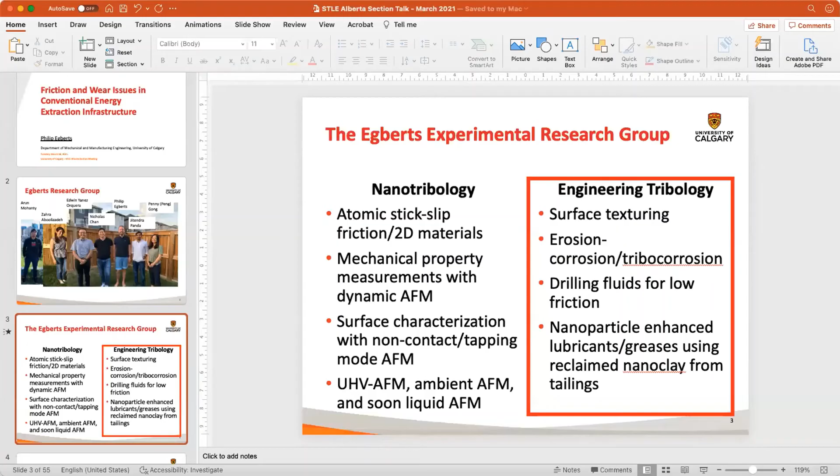Did we lose you, Philip? I will see if I can get a hold of Philip here. Sorry about that, everyone. We'll just give Philip here a minute. I see you, Philip. You're just muted. I vanished for a second. Sorry about that. Is it working still? Can you see my slides? No, I don't see your slides. Okay, let me share the screen again. We've got to love technology. We all know I have frozen a few times, so. Yeah, it got scared. Okay, so are we back up and running now? You're good. Okay, thank you.

Sorry about that. So before I start, I just wanted to tell a little bit about what we do in my group here in Calgary. My group works a lot in nanotribology. About half my students are in this area. Here we're looking more at fundamental mechanisms of friction. So we look at atomic stick-slip friction. We look at two-dimensional materials like graphene.

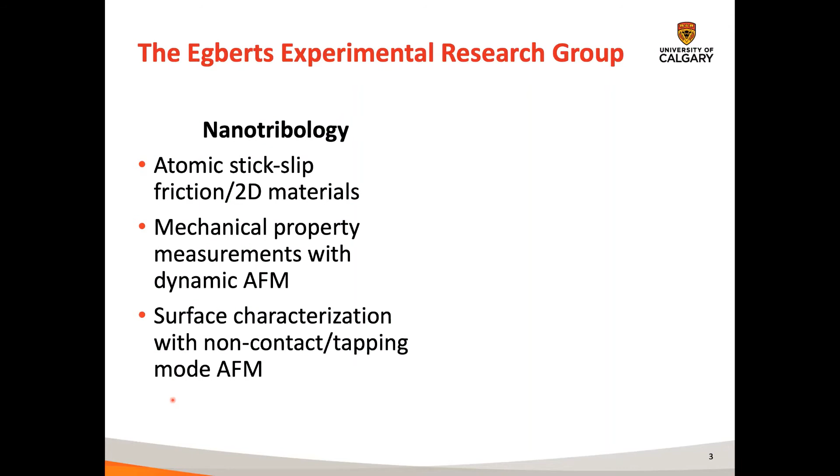We're trying also to do dynamic AFM measurements, which is where you shake the AFM cantilever, and we can basically spatially map mechanical stiffness and viscoelastic properties over surfaces with that. And then we also just do nanoscale surface characterization. We have an ultra-high vacuum AFM, so we can eliminate the contamination issues that we see when you're really trying to get down to these fundamental issues. We also have an ambient AFM and hopefully soon liquid AFM as well. But I'm not going to talk about those projects today.

I'm going to focus on what I call engineering tribology, or tribology experiments or issues that we're looking into that are more relevant to industry. We've done projects previously on surface texturing to enhance lubricity. We are going to talk mostly today about erosion, corrosion, and tribocorrosion experiments. Previously, we have done some work with Secure Energy and formerly Marquis Alliance on making a tribometer to measure the friction properties of drilling fluids with more realistic conditions.

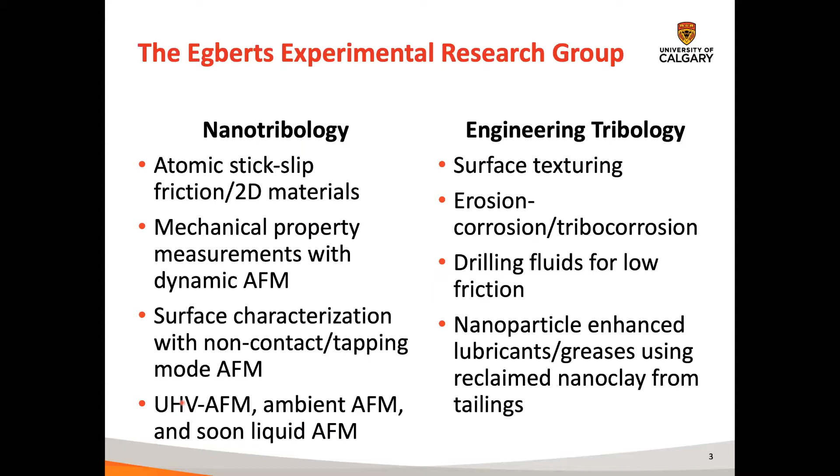Where we're going in the future right now is we're trying to look at nanoparticle enhanced lubricants and greases, particularly using nanoclays. This is a new area where we're hoping to pioneer the use of nanoclay as a more environmentally friendly nanotechnology. Also a colleague of mine has a startup company now where she's been able to extract nanoclays from tailings and other waste products from drilling and other mining activities. So these are the topics we're going to talk about today.

There's probably people that are much more familiar with conventional energy extraction in Alberta than I am, but we've been contacted by a number of companies who have issues with hydraulic fracturing, and I lumped them all together because it makes more sense for a story. In particular, we've been working with Calfrac Well Services, and they have problems with the steel pipes they use in hydraulic fracturing, that they rust and get pits in them really quickly, and they start leaking.

Just for those who are not familiar, in fracturing, you pump a fluid through a steel pipe down into the earth where you want to extract the gas or the energy source, and you use high pressure water that you inject into the soil. The water contains a slurry, which is basically rocks or sand inside the water. Also the water is recycled. As it's pumped in to fracture the rock or the shale formation, some or most of it is recycled in a closed loop. So the amount of rock debris in the water increases as the process continues.

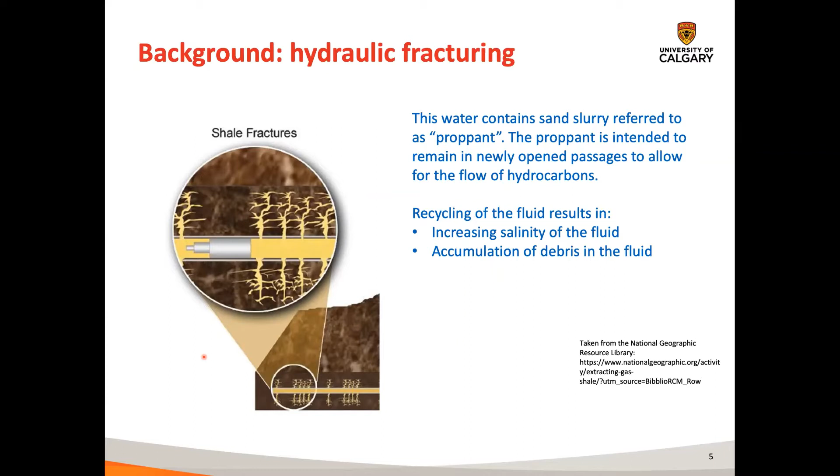The other thing that happens is that the water becomes more and more salty. These two factors are really contributing to the issue Calfrac's having, that these pipes are wearing out quickly because you have rocks hitting the edge of the steel, and you have salty water, which causes corrosion. To graphically depict this, this blue thing here is my steel pipe. We have little sand particles, and over time we get bigger rock particles in it.

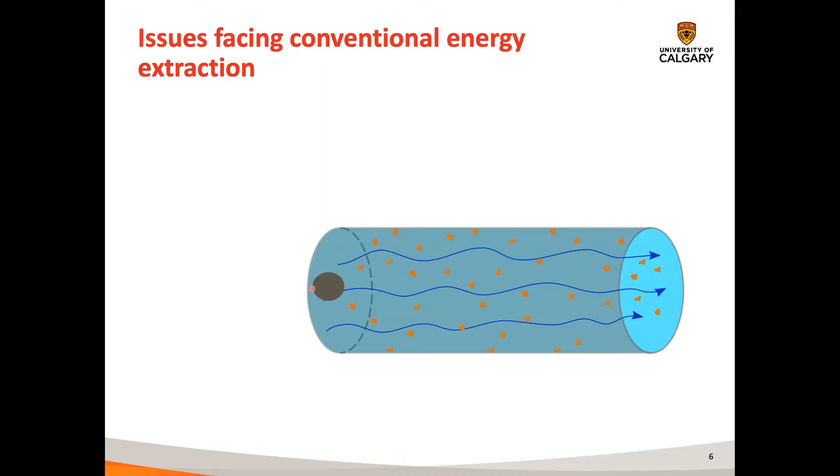For example, Calfrac usually uses uncoated carbon steel pipes because they're really cheap and they're easy to replace. But the lifetimes they're seeing are not what they're hoping for. The other company we worked with, Endurance Technologies, is seeing the same kind of issues with steel pipes used in heat exchangers.

Also, where the heat exchangers are flowing water that contains some kind of debris and it's salty. So what happens is the slightly acidic pH of the water and the salt in the water causes corrosion. So you get rust formation or scale formation on the inside of your steel pipelines. And then the debris from the shale that you've fracked or that you pumped through comes off, and it hits this rust and basically removes it.

It scrapes it off, and then you reform a protective oxide layer on the bare steel. And this process is happening over and over and over again. And so you're basically accelerating the corrosion by rubbing off the protective rust and then reforming it. So it's just corroding the metal very quickly.

And so the other thing that can happen is with mechanical stress, so shear stresses, temperature, you can change the rate of corrosion so that it's much faster than you would see maybe if you were just dipping it in a piece of cold water. And so the impact of mechanical stresses in particular is of great interest in the field of tribocorrosion.

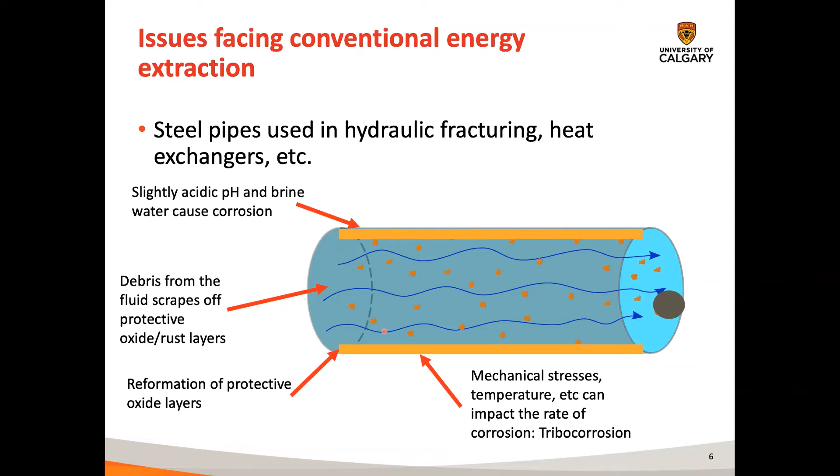So solutions that industry has come up with, which possibly you're more familiar with than I am, but these are just some examples. Usually what I understand from CalFrac is basically that they just replace the steel really fast. And what you could do though also is you could coat the pipe. So this is the first topic we're going to talk about, using a hard ceramic or some other very hard material. If the hardness is higher, the wear rate goes down, so it's more wear resistant. And if you make the coating more lubricious, then if you have this particle impingement on it, it's more likely to slide off. And this first topic is what I will talk about, the technology from Endurance Technologies.

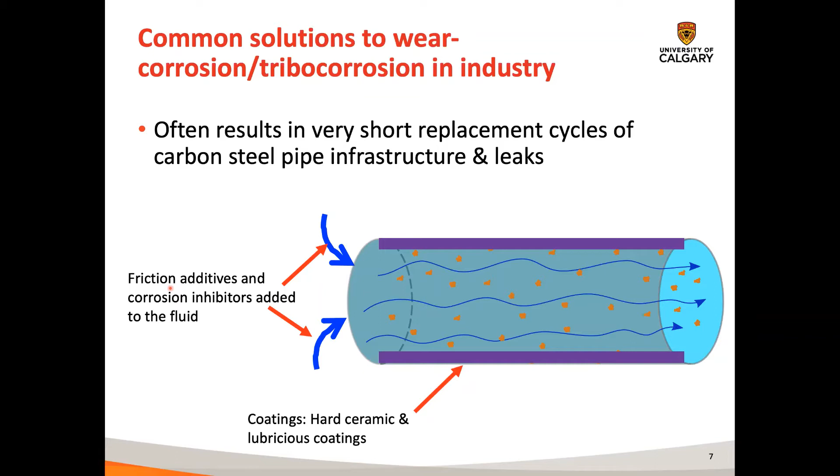And then what CalFrac is doing is they put additives, or I should have said corrosion additives. So we're having a fight with the reviewers over some papers we submitted. So they add friction additives to reduce the friction between the steel pipe walls and the debris, and then also corrosion inhibitors to reduce the rate of corrosion of the pipeline steel.

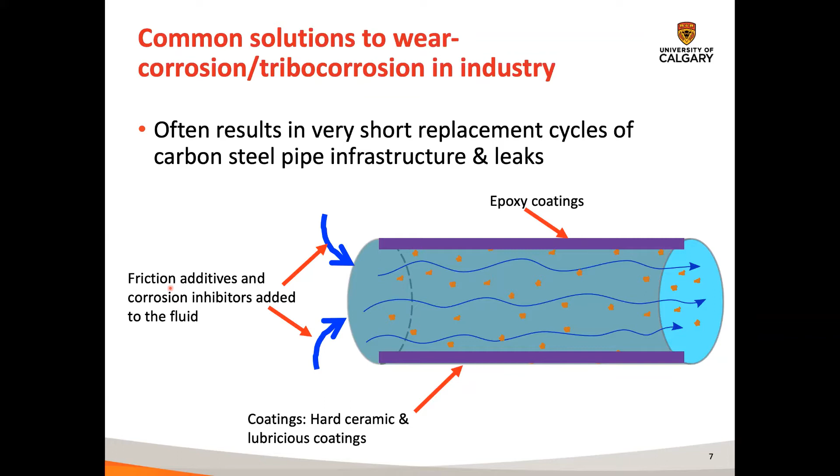And then the last thing that we're playing around with in the lab here is you could use an epoxy coating, which is pretty common in, I think, corrosion science. And so we're looking at how the epoxy coatings might change friction as well between these rock particles and the wall. So the key questions that we're trying to answer in these projects is what works best, coatings or additives. So we haven't directly looked at comparing the two, but that would be a logical sort of question to ask.

We also haven't really looked at cost, but you know, there's so much pipe that you need to use in this case. So is it cheaper to coat the pipes and let them last longer, or is it cheaper just to replace them? I think the question that we also don't know is, what is the environmental impact when you do have a leak in one of these pipes where you don't want it to be? The questions we're really looking at is, how do the coatings or the additives actually reduce wear? What mechanism do they enable when we're adding them into the fracking fluid?

The next question also is, there's a whole bunch of different additives you can add. So let's say you put a corrosion inhibitor and a friction modifier into the fracking fluid. If you combine them, is it better than just having one? It does obviously cost more to put more different kinds of additives in, and so in our minds it might seem better, but is it really? So we looked into this problem, and then figured out which additive works best.

And then lastly, where we started looking at this with our drilling fluid machine, but then the economy changed. So can we use lab tests to replicate real world conditions? So how well can we predict from what we're doing here at the university what is going to happen when you're actually on the drilling site? And so that, I think, would be very interesting to look at in more detail.

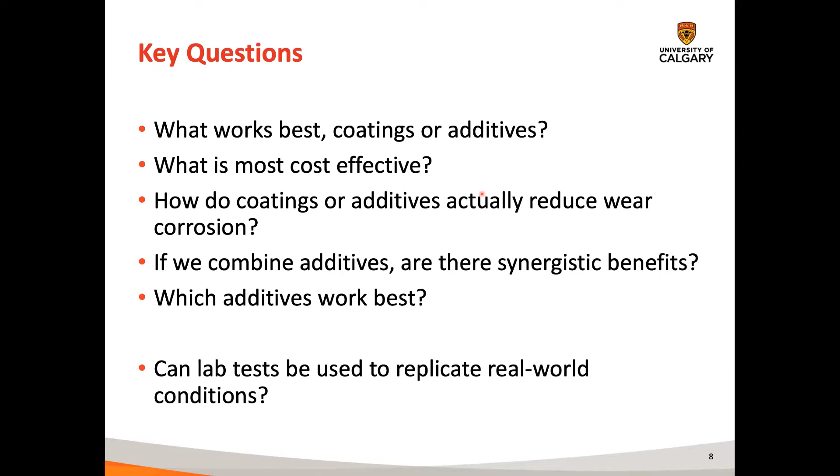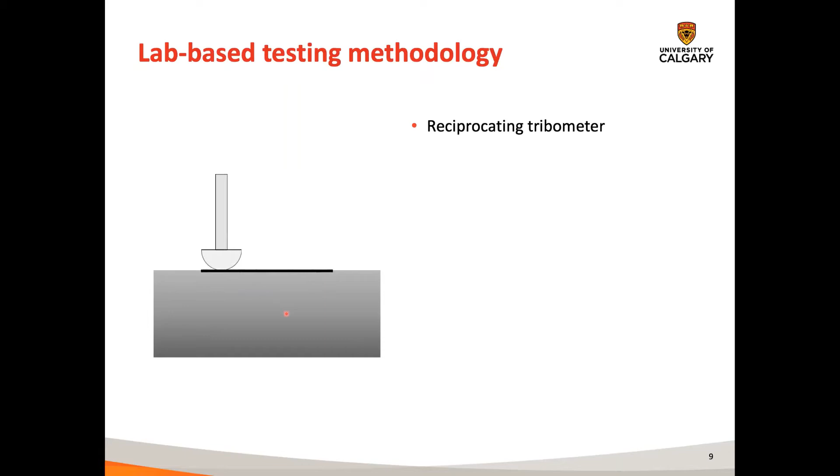Okay. So we're going to use a reciprocating tribometer. So here in the big gray rectangle is the sample of steel. And what we're going to do is rub a counter surface along the surface of the steel. Here we have a sapphire hemisphere that's 6 millimeters, and then we have a steel post that holds the sapphire hemisphere, and we basically coat it in nail polish so it's not reactive in a corrosive environment. And then we immerse everything in an electrolyte if we're doing corrosion experiments.

We've built everything by ourselves, so we can change it or modify it to do all kinds of other things. But normally we're looking at the normal forces and the friction forces. We can also measure, if there's extreme wear, how far this counter surface goes into the steel substrate, and we can incorporate extra sensors like a potentiostat.

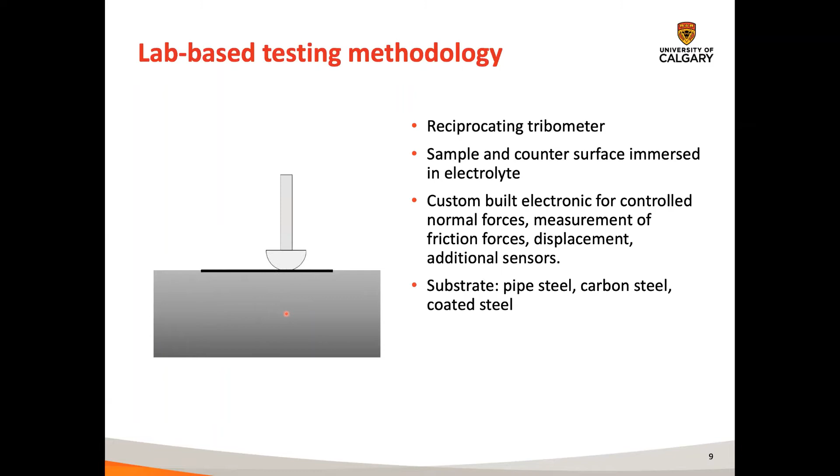We've looked at pipeline steel. So with CalFrac, they actually brought us pipes from the site that haven't been used yet, and they also gave us used ones. We only looked at new ones, and we cut them into pieces to look at in our tribometer. We've also looked at carbon steel and coated steel samples from other partners.

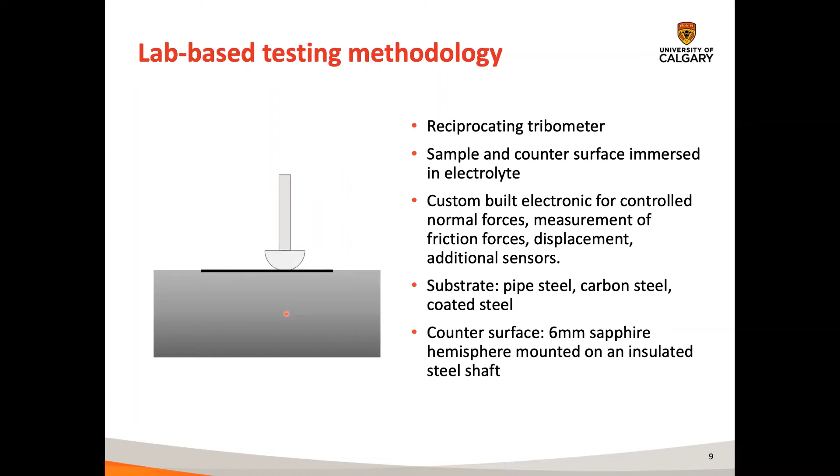And as I said, we're using a sapphire hemisphere. And in all cases, in case you're wondering, we did not see any wear of the sapphire hemisphere. The reason why we're using sapphire is that it replicates the chemistry of the sandy rocks that are in the pipeline. It's very, very hard, so it doesn't wear out. We can then attribute all the wear to the substrate, and it's chemically inactive in electrochemical experiments. So that's why we're using this one.

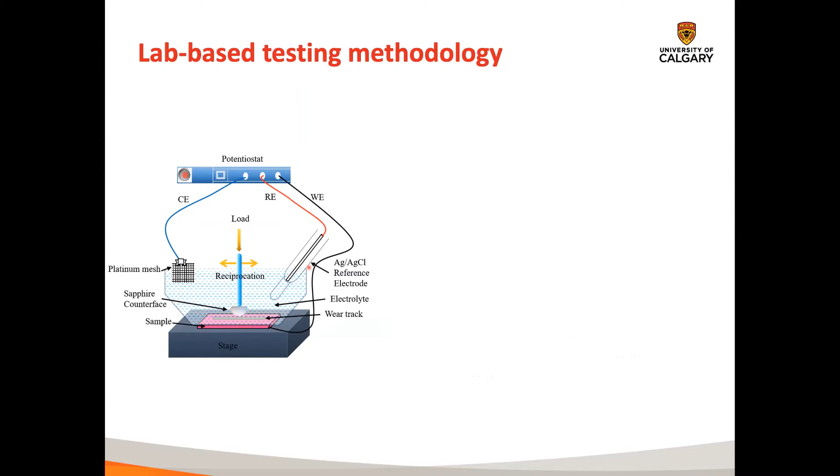We use a 3-probe electrochemical setup. So here we have in pink the sample. Underneath it, we have the stage that's moving the sample. The counter surface is fixed, and we put a platinum mesh electrode for the counter electrode inside of the solution. We connect the working electrode output to the sample, and we have a reference electrode, which is a silver chloride electrode here. And this is what it looks like in real life.

It's been improved. Every new student that comes on adds more and more pieces to it to make it easier to use or more reliable. This is one of the earlier pictures of it, but basically we have a pool that we clamp onto the sample so that it's leak proof and can hold the electrolyte. And then we don't move it too fast, so we don't create any tsunamis or wave pool action in the tribometer.

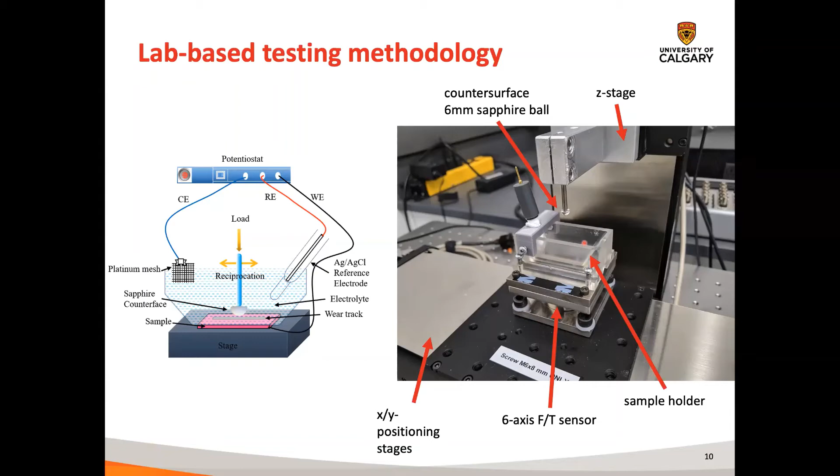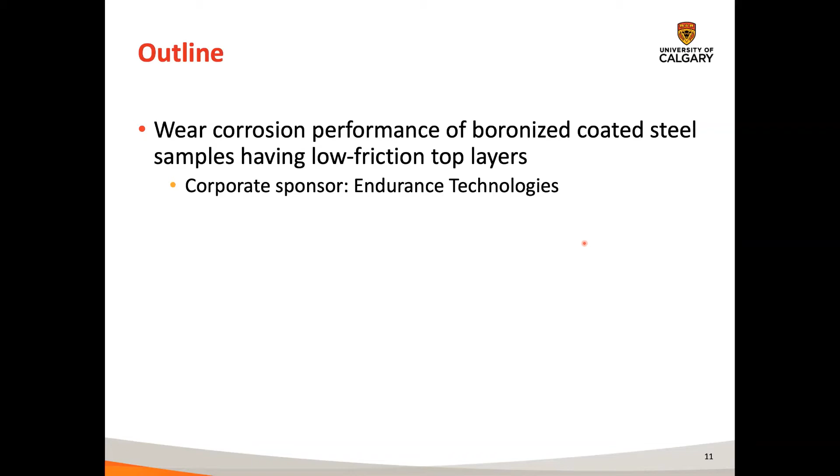So the outline of the talk will be on 2 studies that we've done. One of them is looking at the wear corrosion performance of boronized coated steel samples having low friction top layers, and the sponsor for this project was Endurance Technologies. And then we looked at additive chemistry of hydraulic fracturing fluid for the improvement of wear corrosion performance in pipeline carbon steel. And we performed this with Calfrac Well Services.

And then I have some ideas about future work, but I didn't get those slides in there, and I think we're going to run out of time anyways. So we can just talk about where we're going in the future in this work.

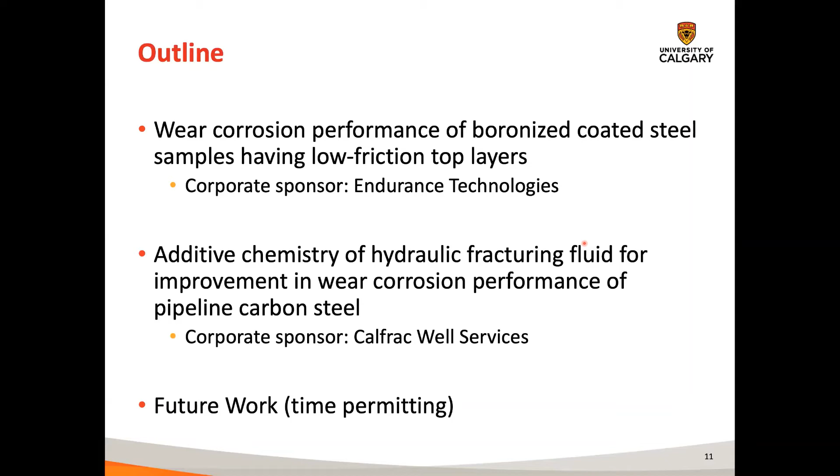So the idea from Endurance Technologies was that you could improve the erosion corrosion performance of steel or other metals by making a boronized layer or coating on top of the steel. And basically what they have is a huge furnace that you can put pipes in of very large sizes that can be put on an 18-wheeler truck, or you can even coat the inside of your heat exchanger with this process.

And this process results in an ultra hard coating that is 14 to 20 gigapascals. And iron borides are in general corrosion resistant. So you enhance the corrosion resistance of the steel.

And I think when I saw a talk from them, they said that the resistance is like a factor of 20 improvement in the lifetime of the pieces. They're looking at new processes where they can also put low friction or dry lubricants on top of the boronized steel. For example, boron nitride, and they play with the chemistry of the boron nitride a little bit so that the friction is even more reduced, and so these particles can slide off even easier.

And so the thickness of this low friction top layer is about 5 to 30 micrometers, and then they have this ultra hard coating that's about 150 micrometers below it, and then you have the base steel. In this case, we're looking at carbon steel and stainless steel.

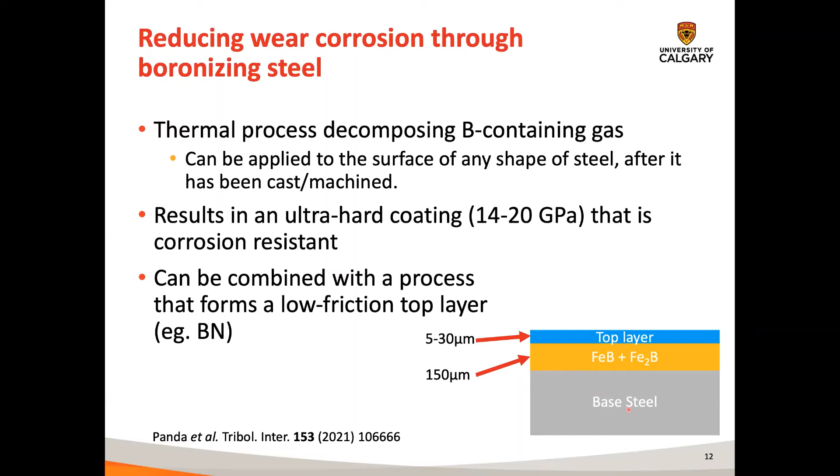We can look at the microstructure of the surface. So here on the left, we have the base steel. When you do this boronizing process, you get 2 different kinds of iron boride. One is Fe2B and one is FeB. They have a slightly different microstructure and different mechanical properties. And so we have a nano indenter, so we can track the mechanical properties from the bulk of the substrate all the way to the surface.

And what you see here is the carbon steel base layer hardness, and this is the hardness of the stainless steel. So stainless steel is a bit harder, which imparts more wear resistance, but you can see there's approximately a 2-fold improvement in hardness from the stainless steel to the boronized steel. And so you really see an enhancement of the wear performance of these coatings from this improved hardness.

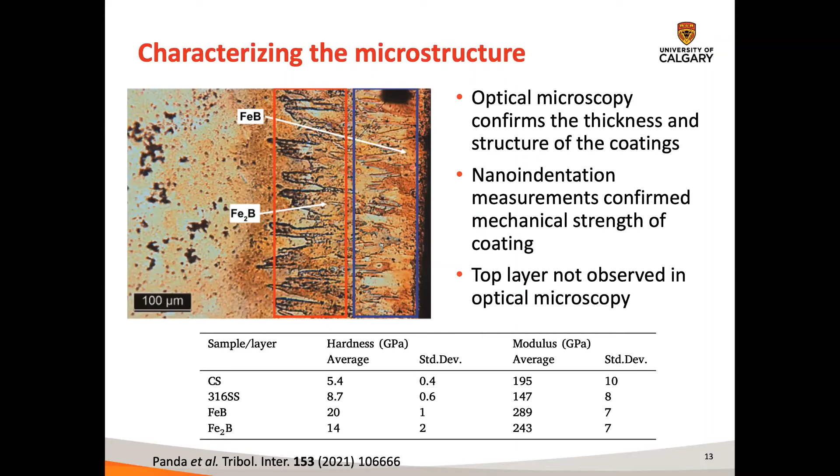We did not see, however, in these optical microscopy images, the top layer. This low friction top layer is not visible in this picture, so we have to look at it in other ways. So the first experiment we performed is looking at how these coatings performed in dry sliding, when we did not put any corrosive solution in our tribometer.

And so we have all these different samples here, which is slightly confusing. This is the stainless steel sample. CS is for the carbon steel. And what you see here is the friction coefficient of the stainless steel is really quite bad. These are all different boronized steels, coatings that have different layers. I'll pick out two that we should pay attention to. So this one that's labeled BB, basically on the top coating...

And then I just got a message that my connection's unstable. Can everyone still hear me? Not working. I'll keep going. There's the chat. You're getting a bit... Okay.

All right. So this BN has nitrogen in it so that it's harder, and it was thought that it improved the wear resistance of this coating. And this BB has extra boron in the boron nitride layer, and it is very lubricious, basically. And so Endurance Technologies is really looking at this technology following their own internal experiments.

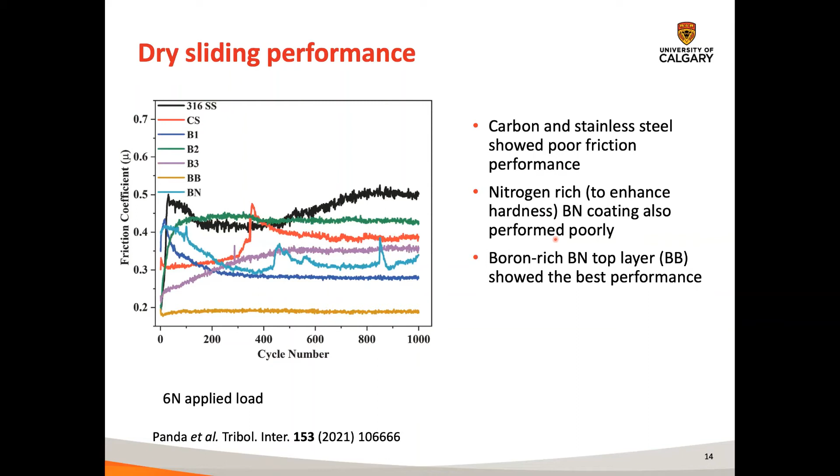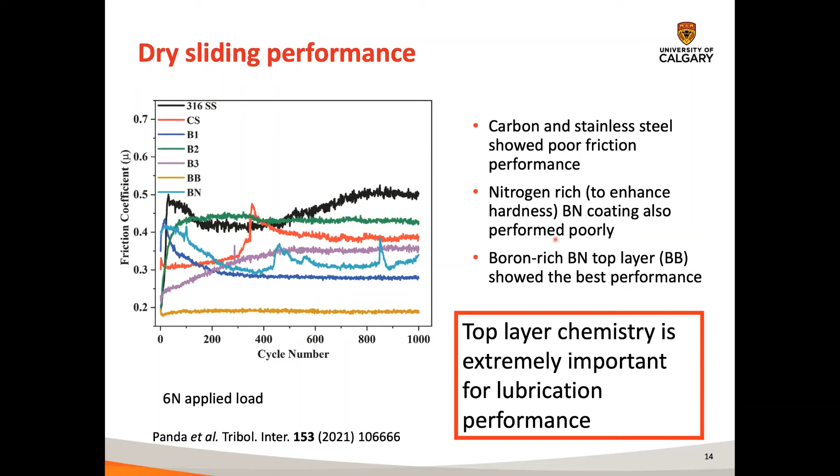So carbon steel and stainless steel showed poor performance. The nitrogen rich, or hardened coating, didn't perform well at all in these dry sliding experiments. And the boron enhanced top layer performed very, very well in dry sliding. So what we know from these experiments is that the top layer chemistry is very important. Not all boronized steels are created equally.

And the boronized steels have a more positive value than the carbon steel, but a more negative value than the stainless steel. So they're not as corrosion resistant as the stainless steel, but they're better than the carbon steel. And we see that these boronized steels essentially have very similar corrosion potentials compared to each other, okay?

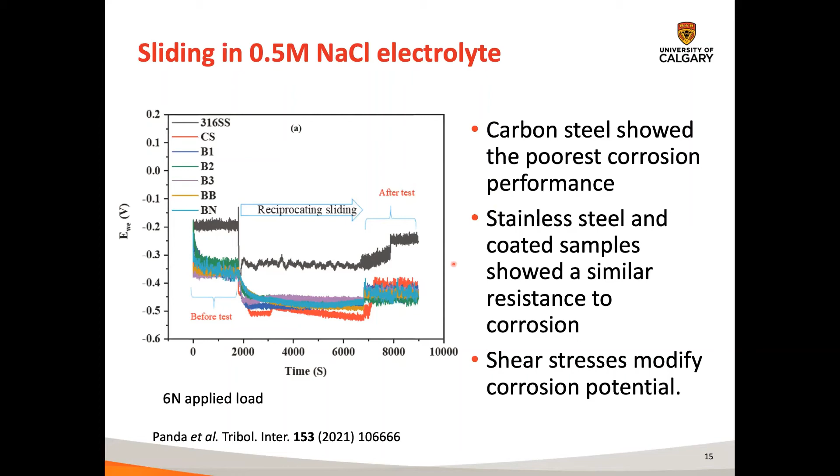And we also see that the shear stress or the rubbing action of the tribometer significantly alters the corrosion potential. So when we start rubbing back and forth, we see that everything starts corroding a lot more than it was before we started the experiment. And so this is sort of the issue of why the pipes are wearing out so much in these hydraulic fracturing applications.

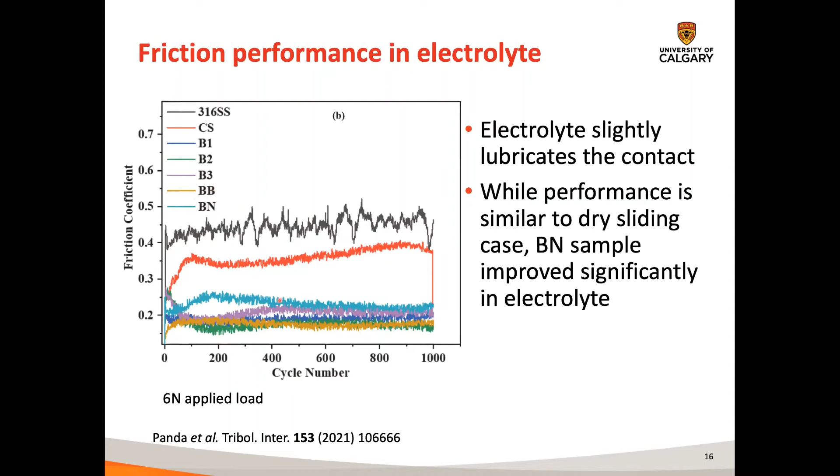We can also measure the friction coefficient while we're doing these corrosion measurements, and we see here that now the friction coefficient of the carbon steel increased significantly, and we see very low friction in these electrolytes of the boronized steel. And we still see that this boron enhanced top layer is really performing a lot better than all of the other coatings.

How is the corrosion measured here? So in this case, what we're doing is we're measuring the working electrode potential as a free parameter. We're not applying any potential to the sample, and we're measuring the working electrode potential while it's immersed in the bath. And when I say we start sliding or we stop sliding, essentially we just press the tip in, we wait for time, and then we start sliding back and forth. And we're recording simultaneously the potentials and the currents with the potentiostat while we're measuring the forces, if that answers the question properly.

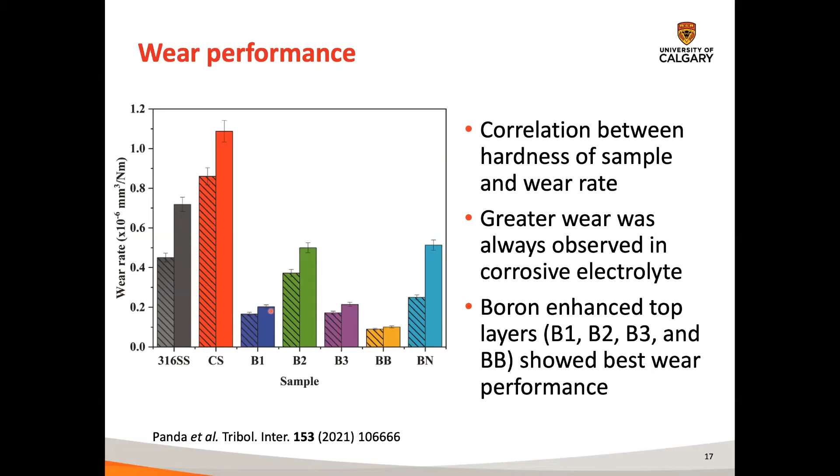Right, so again, when we compare the wear rates here, the boron enhanced top layer performs the best of all the different samples, in both dry sliding and in the electrolyte. And the carbon steel performed the worst, which is sort of obvious from what we know about carbon steel. And in general, though, all boronized top layers did pretty good for their low wear rates.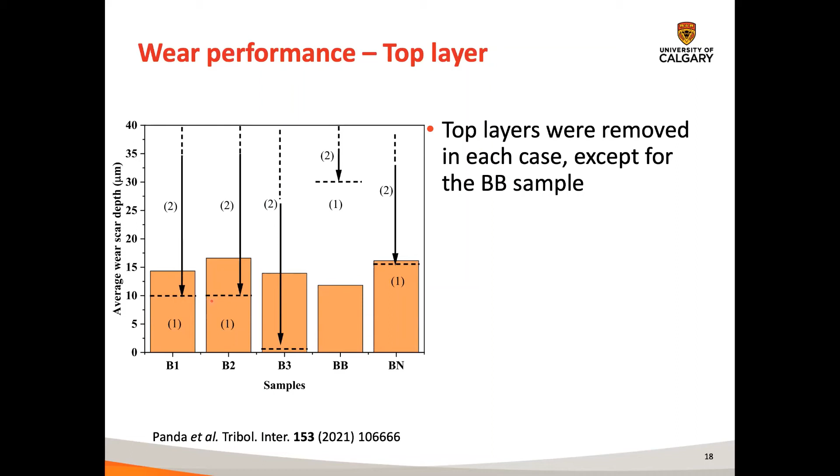In the other cases of these boronized steels, the top layer was completely removed, and we were wearing out the boronized FeB, Fe2B coatings. Okay, and so this really shows that this enhanced boronized top layer would be important to use if you wanted to ensure that you had this lubricious top layer. What we'll show later is that the long-term friction performance is really dictated by the tribofilm, or the chemistry of the worn material, the electrolyte, and the boronized steel below it.

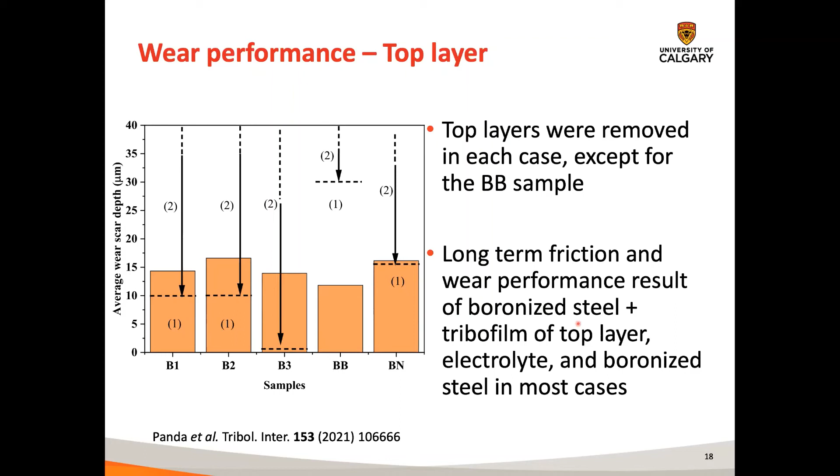We looked at the surfaces in both optical microscopy and electron microscopy, and I'm just going to pick out two quick examples here. Here we have this nitrogen enhanced boron top, or hexagonal boron nitride top layer. That's the harder coating that didn't perform as well. And what we see here is delamination of the coating. You can see the underlying steel substrate here. And this stuff is the top layer.

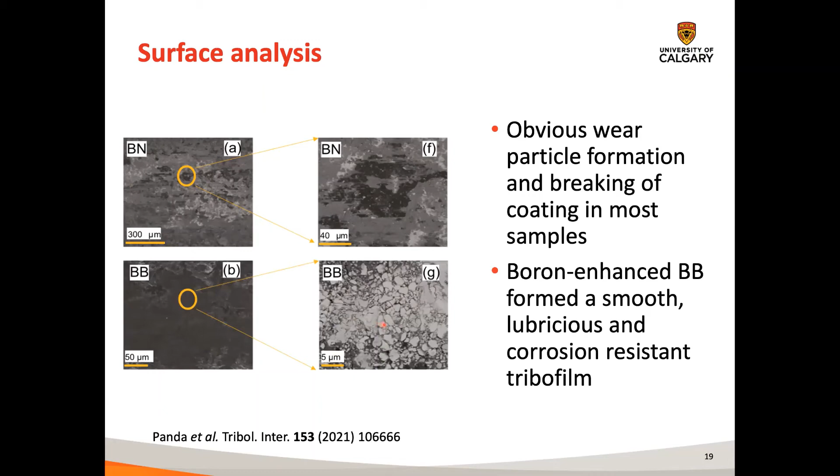And if you compare this to this boron enhanced top layer, you don't see this removal of the top layer. You can't see into the substrate, and you see this sort of plate formation in the wear track itself. And so this is what's really providing this lubricious friction coefficient that we measured in our experiments.

So the idea, or our proposed mechanism, is that when we put the steel — this is the counter surface, the electrolyte, the steel, and the sort of stage that's moving back and forth — when we put this in with the steel and the electrolyte, we form a rust or a scale on top of the steel, and then we rub the counter surface back and forth, and we basically tear off the coating. We form wear particles, which are hard, and then this in turn starts removing more and more material.

We also have corrosion happening of the steel at the same time. When we have this boronized layer on it, we don't form the wear particles that we would in the carbon steel sample, and especially when we have the lubricious top layers, and so we can maintain the thickness of this protective layer on the steel.

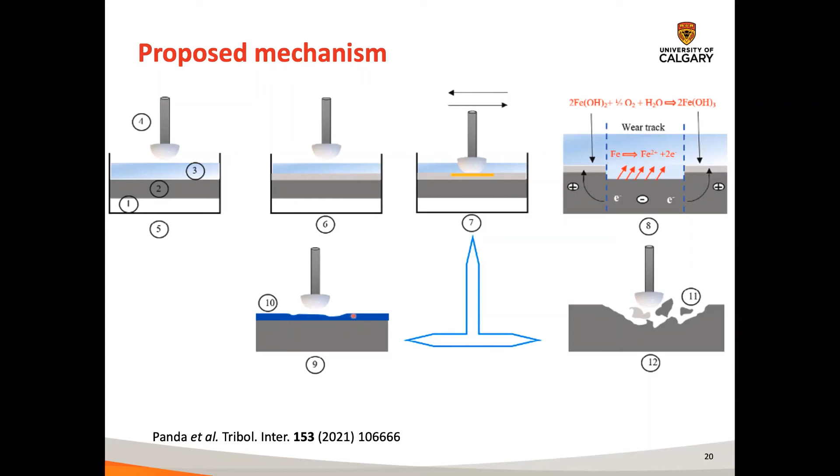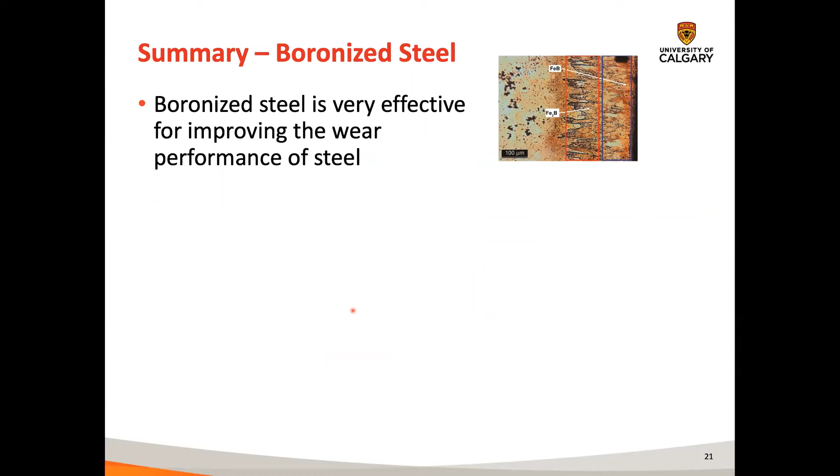So just to sort of wrap up this project, the boronized steel is very effective for improving the wear performance of the steel compared to carbon steel. The top layer chemistry is really important for reducing friction and corrosion performance. And then we did use very high contact pressures. So it's in the gigapascals range.

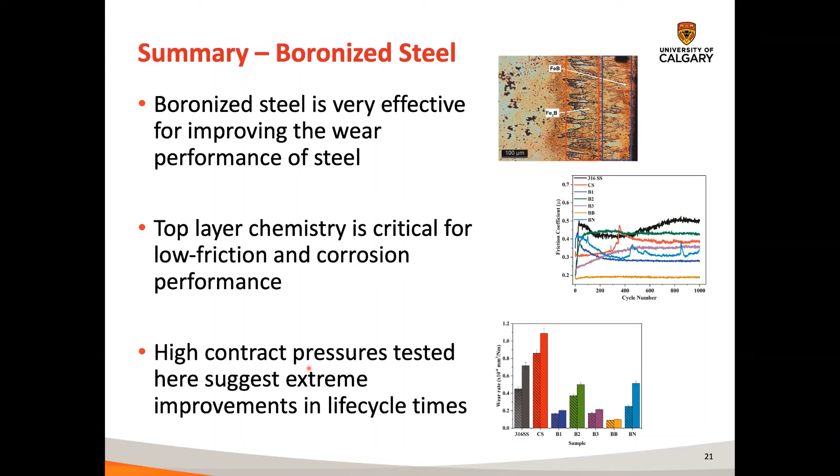So likely the impingement of the rocks or debris in the pipeline is not going to have such high pressures. But we can show that the lifetime is significantly increased when we use this boronized steel because we did use these high pressures.

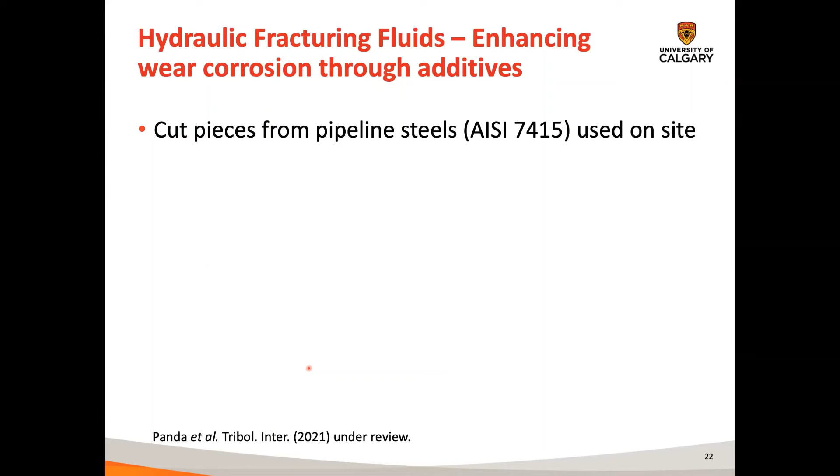So moving on to the second topic I wanted to talk about is looking at hydraulic fracturing fluids. And so what we did is we cut pieces from the pipeline steels that they were using on the fracking site. We compared deionized water to high TDS, so this is total dissolved solids. This is the fluid that they basically took from the site in giant buckets and brought to the lab. So it has all the rocks and stuff in it.

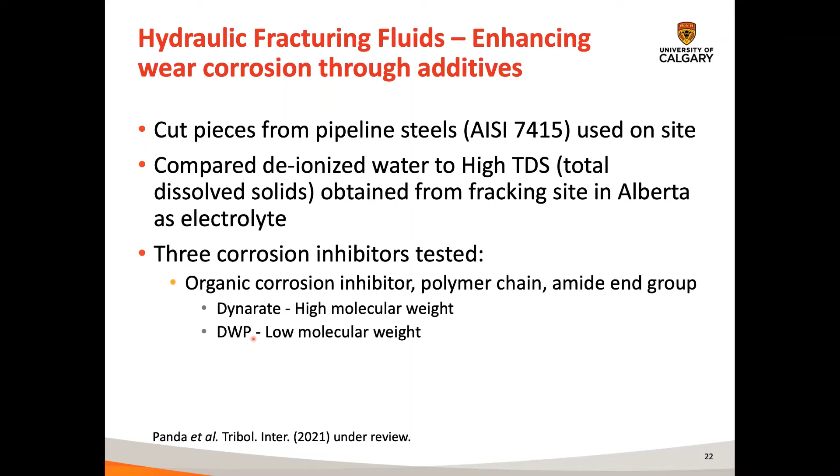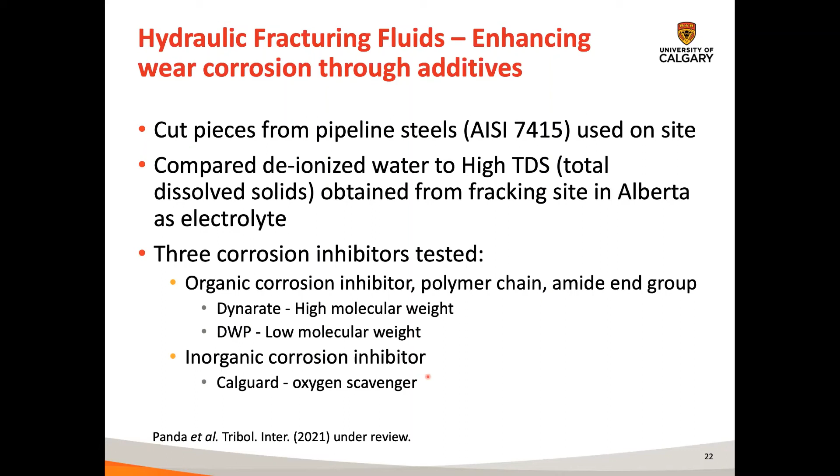And then we tested 3 corrosion inhibitors. So we looked at an organic corrosion inhibitor. There was one high molecular weight and one low molecular weight one here. So Dynarate is high molecular weight, DWP is low molecular weight. These are the trade names of the additives they're looking at. And we used an inorganic corrosion inhibitor, which is called CalGuard, and this is basically an oxygen scavenger to reduce the oxygen concentration in the fluid.

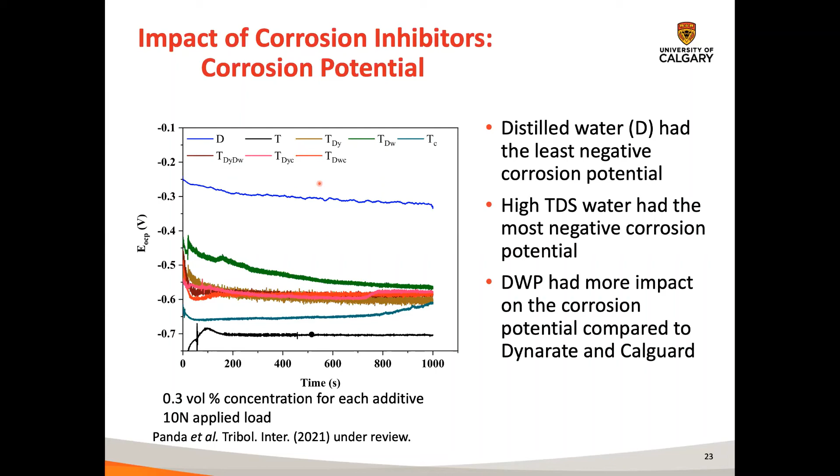And then when we put the different additives in, they did what they were supposed to. So they changed the potential, and so it's less corrosive as you add these different chemicals in. And in this case, we looked at adding both the 2 organic friction modifiers at the same time. And when you see C here, we added the CalGuard and one of the friction modifiers as well. Right, so DWP has more impact on the corrosion potential compared to the other 2 corrosion modifiers. But we'll see later on some interesting results with the friction testing.

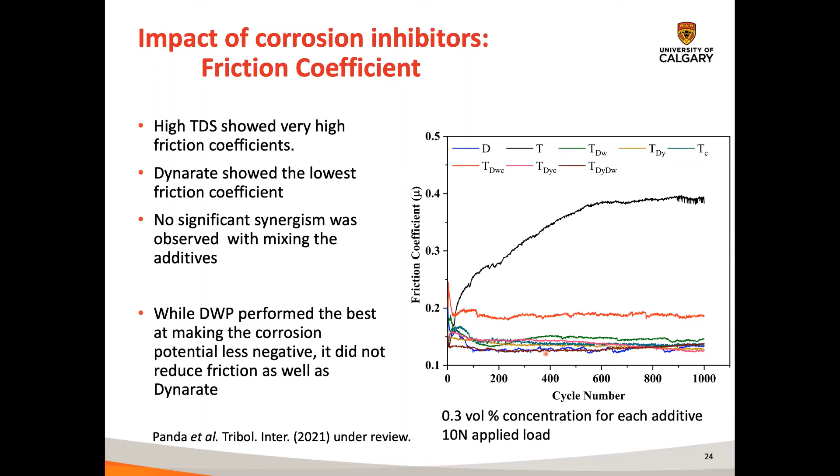And we didn't really see that if you mix 2 different kinds of additives together, there wasn't really a change in the friction coefficient. So while DWP performed the best for reducing corrosion in terms of the potential, Dynarate performed better for reducing the friction coefficient.

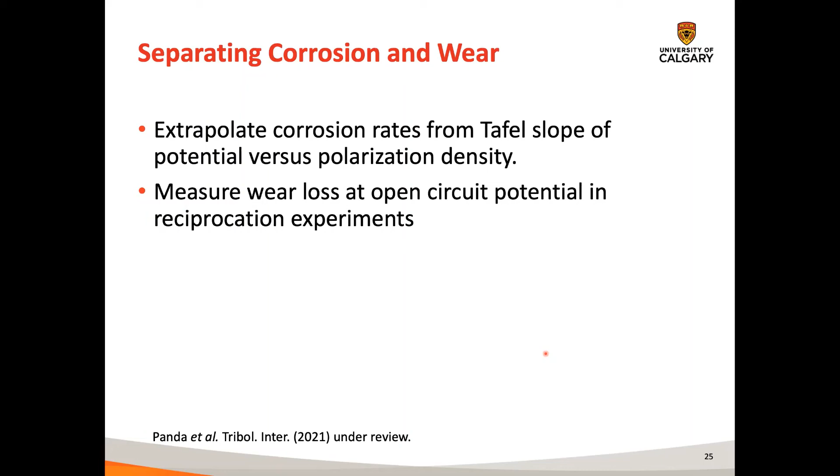So what do we do now? We have all these parameters. So we want to figure out what's corrosion and what's wear, and how the corrosion and wear might be acting synergistically together. So we extrapolate corrosion rates from the Tafel slope of the potential versus polarization density. In stage 1, we measure the wear loss at an open circuit potential in reciprocation experiments. And then we apply — this is my bad corrosion science, so Zoe, I'm sorry — we apply cathodic protection.

This was sort of my application here to stop corrosion. So we apply -1 volts to the sample, and so basically we have only mechanical wear happening on the sample. And then what we do is we look at the total wear of the experiment.

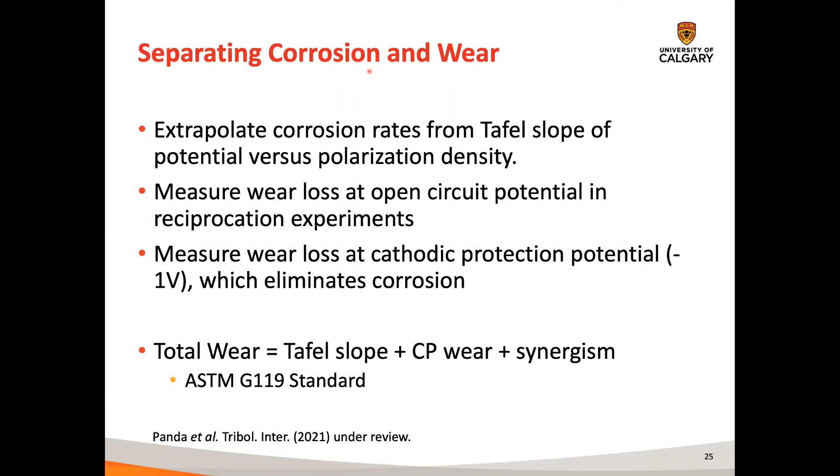And then we make a combination of the total wear equaling the Tafel slope from only corrosion, the cathodic protection potential, which only looks at mechanical wear, and then the remainder between the total wear and these two parameters is the synergism, or the interaction of corrosion and wear to accelerate the wearing out of the pipeline steels.

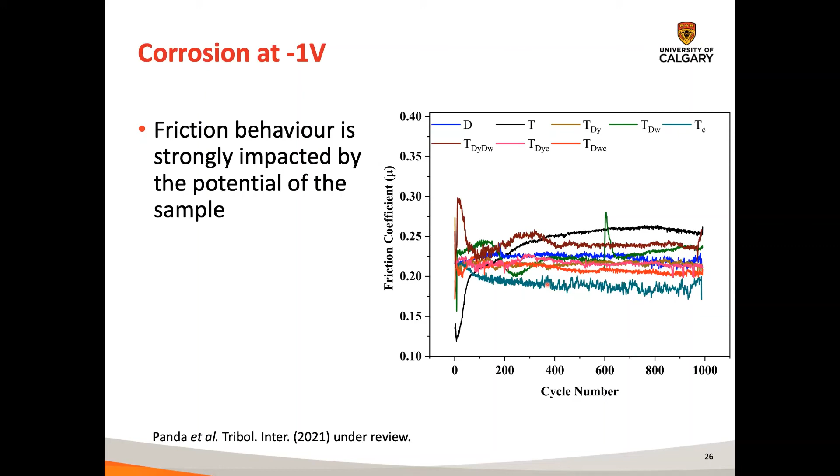And so what we see is when we apply this -1 volt to the sample, we really change the friction coefficient. So if you remember, the TDS water really increased the friction coefficient a lot higher, and these values are similar to what they were before for the other additives. And so the corrosion is really impacting the friction behavior.

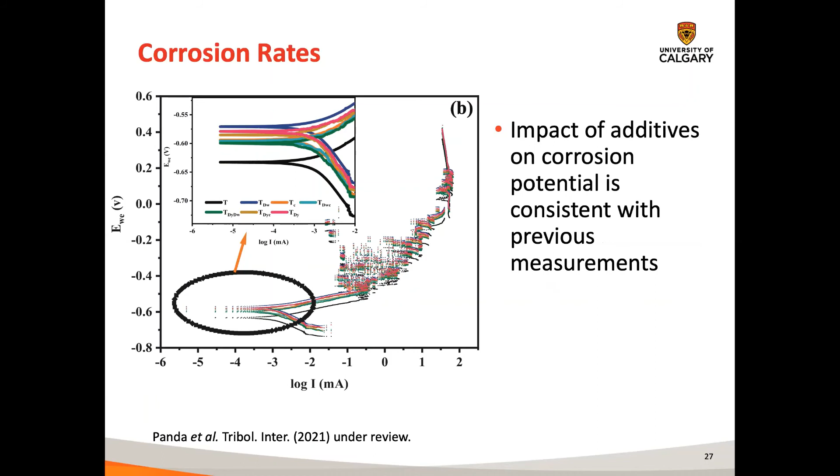In all cases, though, we used very high loads compared to what would likely be experienced on site. We show that mechanical wear is really high with these high loads, and there is significant enhancement of corrosion and wear when you combine the two in our tribometer.

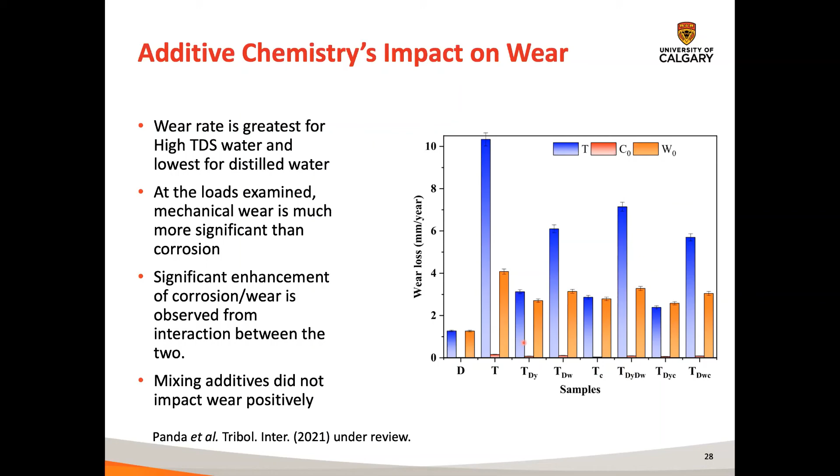We also see that when we mix the additives together, there wasn't such a huge increase in the performance. So if you see here this Dynarate wear rate compared to the DWP, when you add the two additives together, it actually performed worse with two additives than just with the one. So mixing additives in our study didn't show any sort of synergism between the different additives.

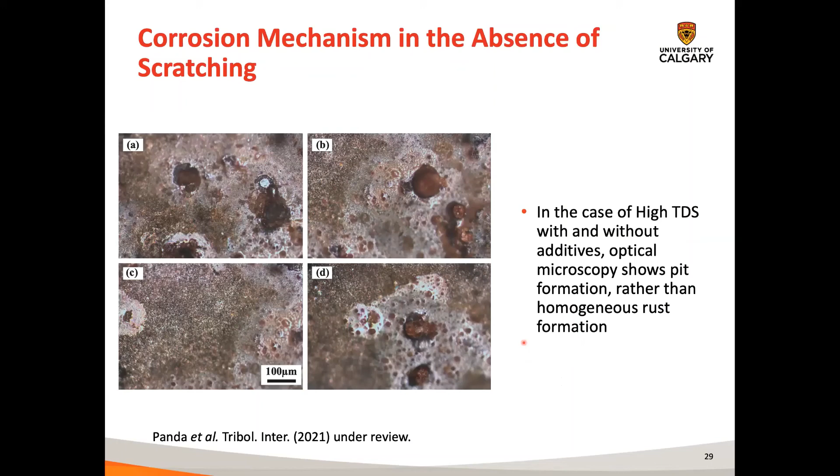We looked at the corrosion mechanism in the high TDS water away from the worn areas, and we saw that pitting formation was the likely mechanism of corrosion in these cases. I'm skipping over a bunch of things that we looked at, but what we think is happening is we add these organic friction modifiers, and they sort of form these groups on the surface. They adsorb on the surface, and with the higher molecular weight, we see adsorption on both the counter surface and the substrate, which really reduces our friction coefficient and wear rates.

Do you compare the lab erosion to field data? We don't have any field data from the piping. Basically, the economy got really bad when we got all these results, and so everyone vanished, and we haven't really had a chance to look at field data. So I don't know what the lab data would show.

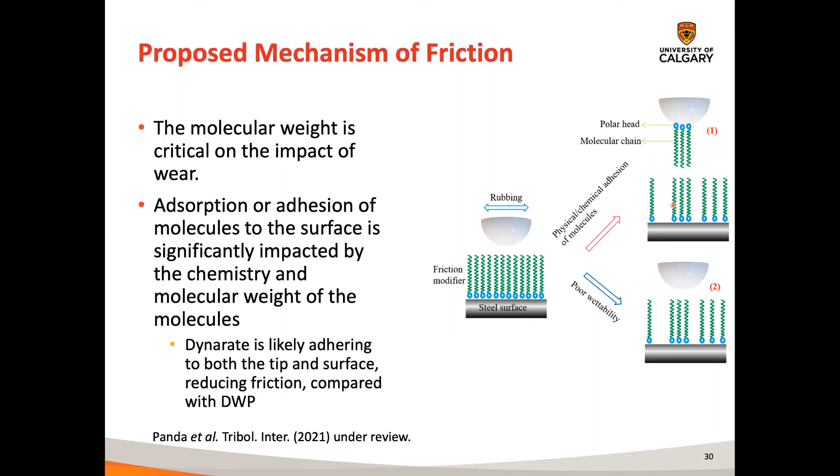Right. So we think that Dynarate is sticking to both the counter surface and the substrate compared to DWP, and that's why we're seeing this benefit from this additive. So to summarize, we see that organic friction reducers are more effective at reducing wear and corrosion than the inorganic additives. We looked at the mechanism, and mixing the additives didn't really show any impact on the wear, friction, or corrosion rates.

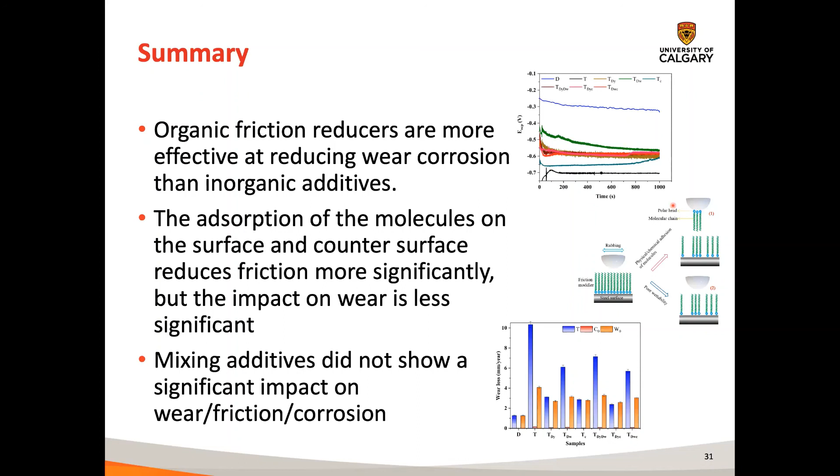Just a quick note, because I know I'm running out of time here. We also started doing a statistical analysis of the impact of the different additives on the wear rate, the friction coefficient, and the corrosion. And when we did this, we saw that basically the more you increase the Dynarate, the better everything got. We only went up to 1 volume percent, but around 1 volume percent is where you would hit the solubility limit of that additive.

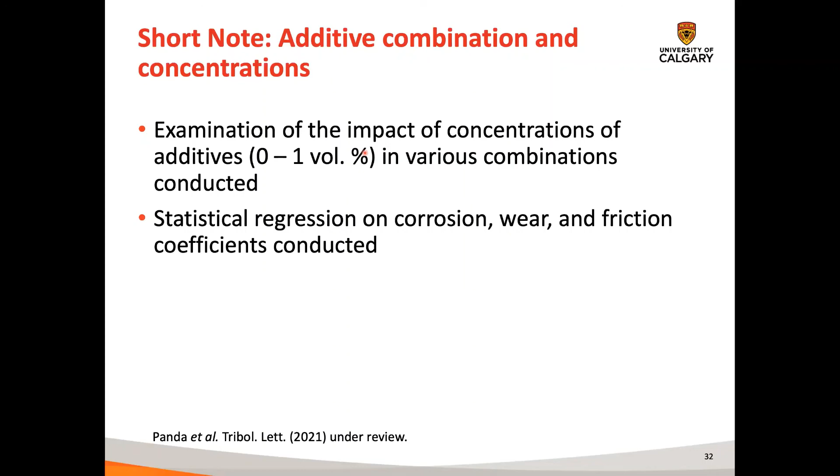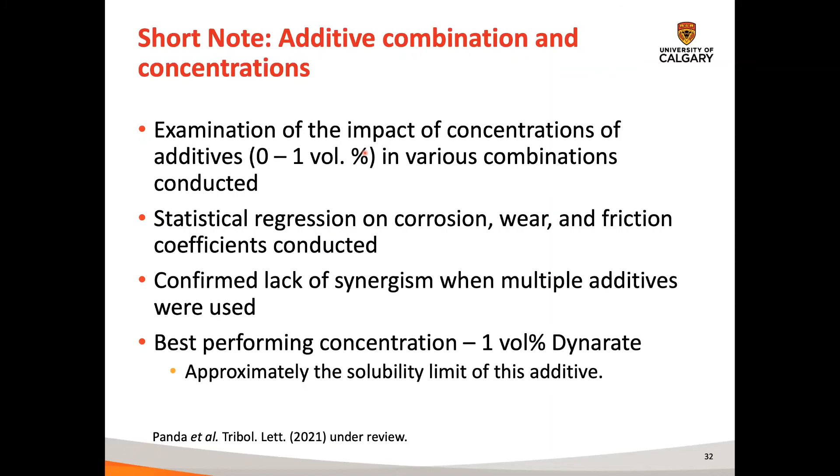And we did this statistical regression on these different parameters based on the concentration of the additives. And we confirmed that also there's no real synergism when you use multiple additives. And yeah, as I said before, Dynarate is the best additive here.

And so just to summarize the whole idea of the talk, we did friction and wear testing of pipeline steels with different coatings and additives, and we can look at mechanistic ways that these additives or coatings are changing corrosion and friction, and this is really important for the development of the various technologies.

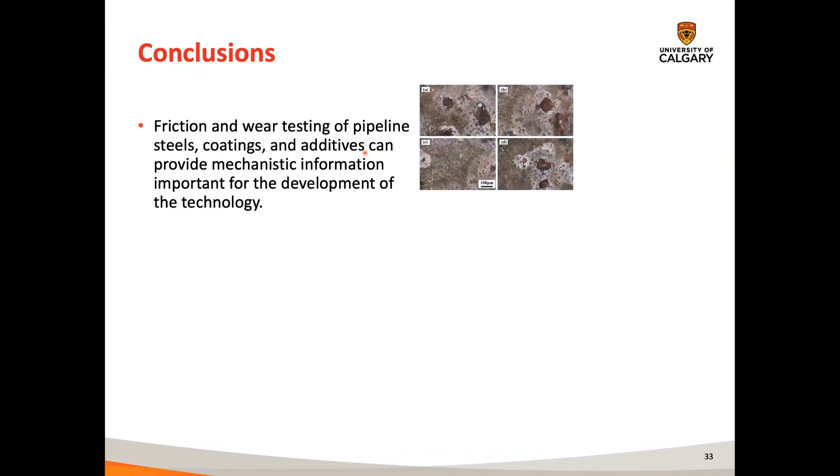We also do these reciprocation measurements, which are not the standard tests done for erosion-corrosion. We don't do impingement testing, for example, but we can get a wealth of information out of this kind of testing that you can't get from impingement testing.

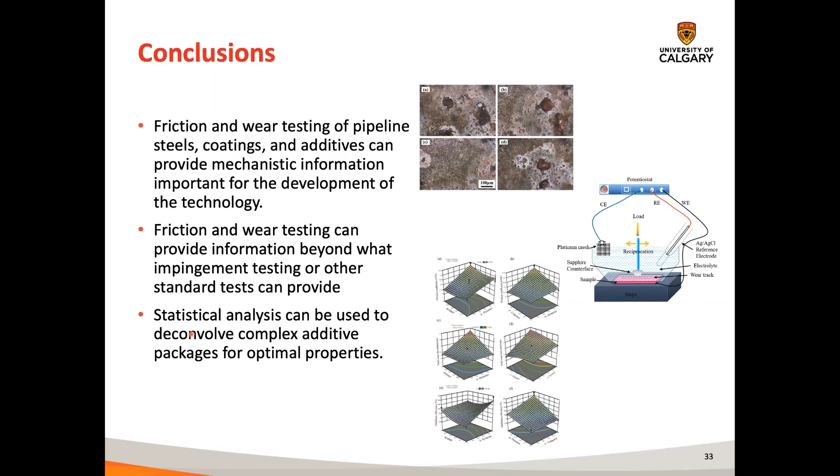And so, I didn't show this graph, this is our statistical analysis. We use this analysis to sort of deconvolve complex additive packages to see which additives are working better than other ones, and then this could be used to optimize the concentration of your additive package, or remove things that are unnecessary and costly.

And what we're hoping to do in the future is to use this kind of statistical analysis to get one step further and look at it in terms of using machine learning or artificial intelligence to train the computer to sort of guess where we should do our experiments next.

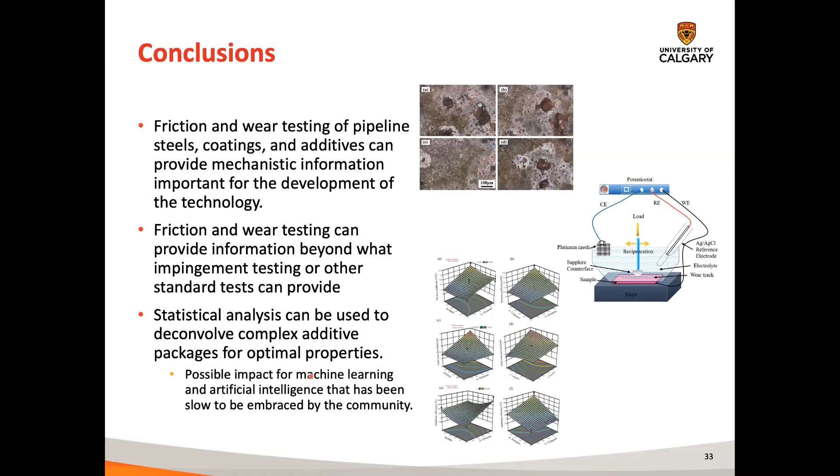This is a technology that's just starting to get popular. You've been hearing it in the news a lot, but it's really slow to be embraced by the tribology community. And we're really excited to look at how we can use these computational techniques to sort of guess what the mechanisms are, or help us make our experiments more efficient.